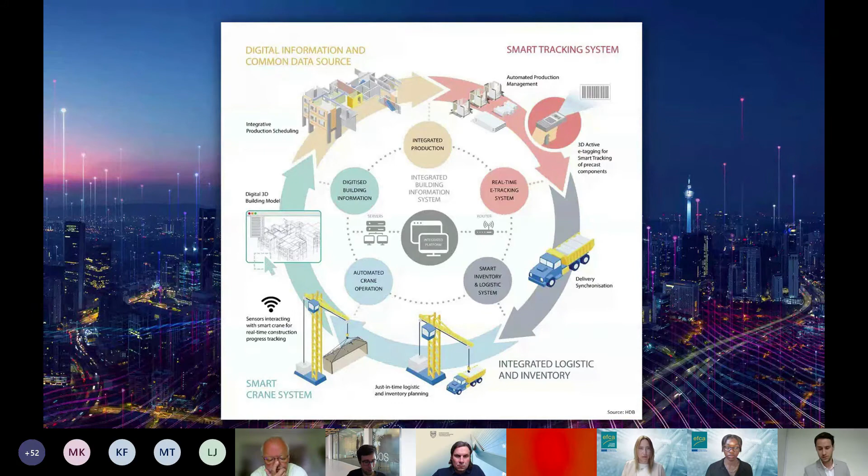Through this project, I learned to work across borders with people and stakeholders from all over the world with different backgrounds and different cultures. I also learned to work on multidisciplinary teams that go even beyond typical civil engineering work. Think about, for example, software development, on very innovative and disruptive projects for one of the biggest developers in Singapore.

And I also learned to envision new approaches for our industry and also learned to adopt new approaches to manage these innovation projects, such as Agile. Because I learned on the way that the typical engineering and project management approaches don't work for these very innovative projects.

So I hope that through the digitalization of our industry, we keep on attracting young, new and enthusiastic talent to our very exciting industry. And I also hope that because we are full of opportunities in our industry that can contribute to the fuller sustainability of our world.

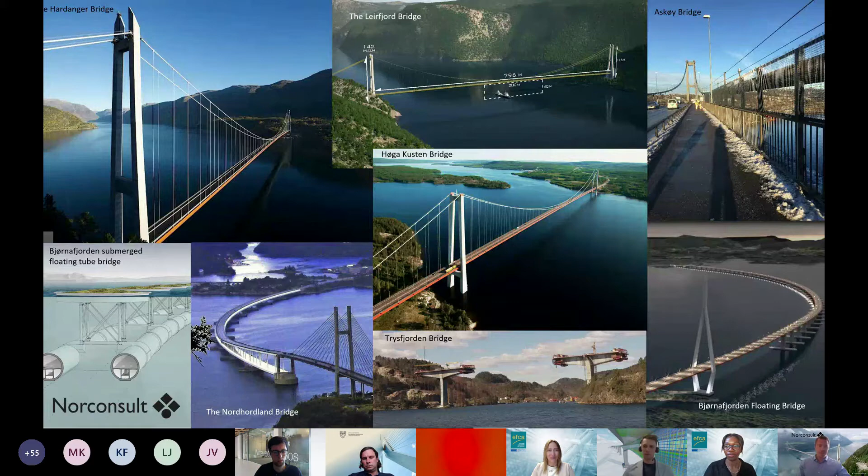I've been fortunate to work with many amazing long-span bridges so far in my engineering career, and by looking at this, it's hard not to fall in love with these structures.

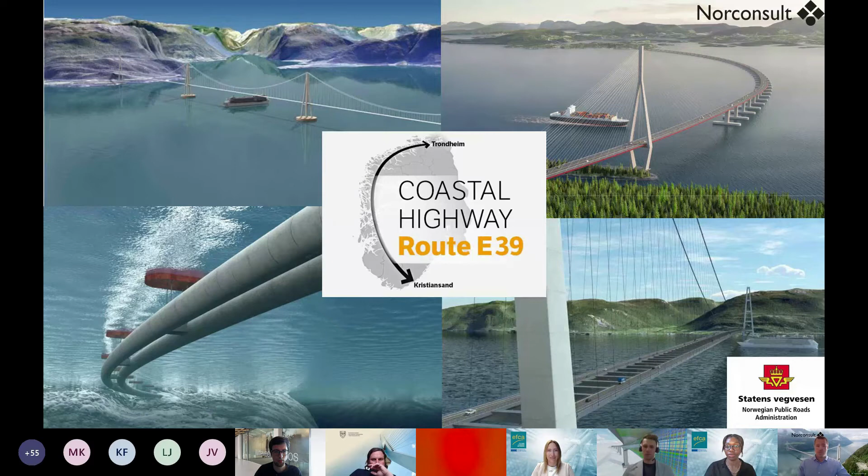The Norwegian government is planning to build a ferry-free coastal highway route along the country's west coast. And to achieve this, several wide and deep fjords need crossing with bridges and tunnels. The fjord crossing project is developing long-span bridge technology for efficient crossing of all these fjords.

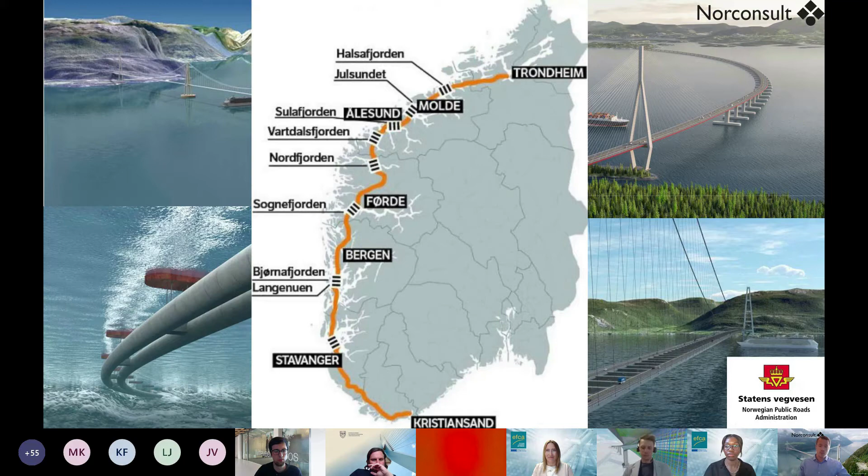And the Norwegian Public Roads Administration is managing the project, consisting of two parallel processes: development through engineering consultant companies and extensive research activity. And I've been so lucky to be part of both branches, through my company Norconsult and through my PhD research.

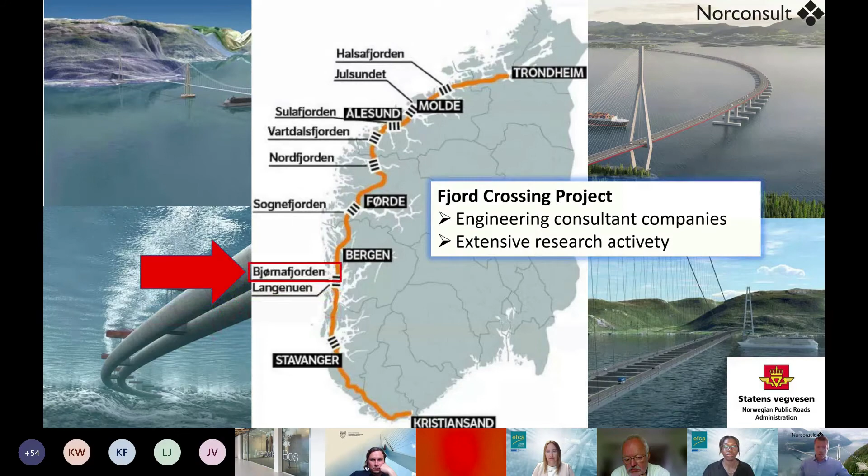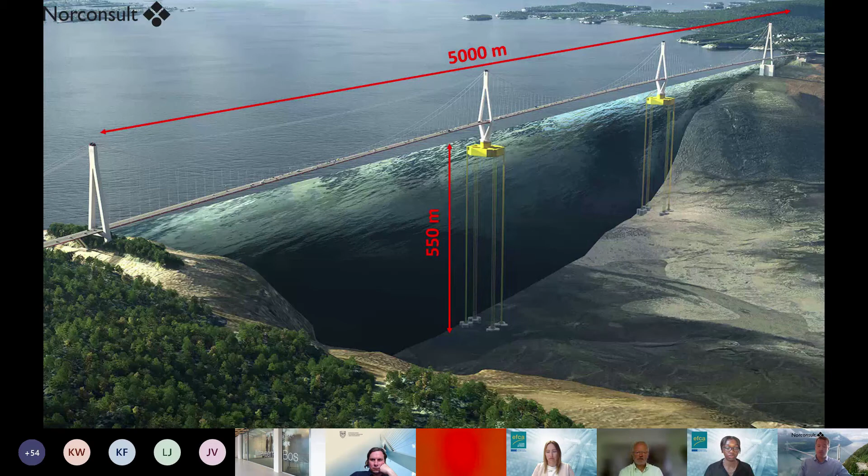Let's take a closer look at the spectacular Bjørnafjord crossing, which is a prioritized connection. The Bjørnafjord is 5 kilometers wide and as deep as 550 meters. Several bridge concepts have been studied for this fjord and evaluated, and the current choice is a curved, side-anchored floating bridge with a cable-stayed high bridge in the south end.

The west coast of Norway is famous for its rough weather, and the bridge concepts considered in the fjord crossing project are all extremely slender, making dynamic excitation from wind and waves very important.

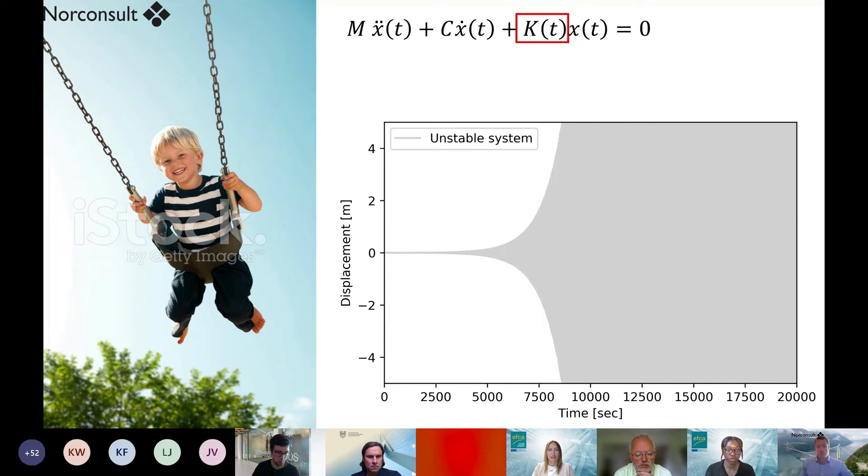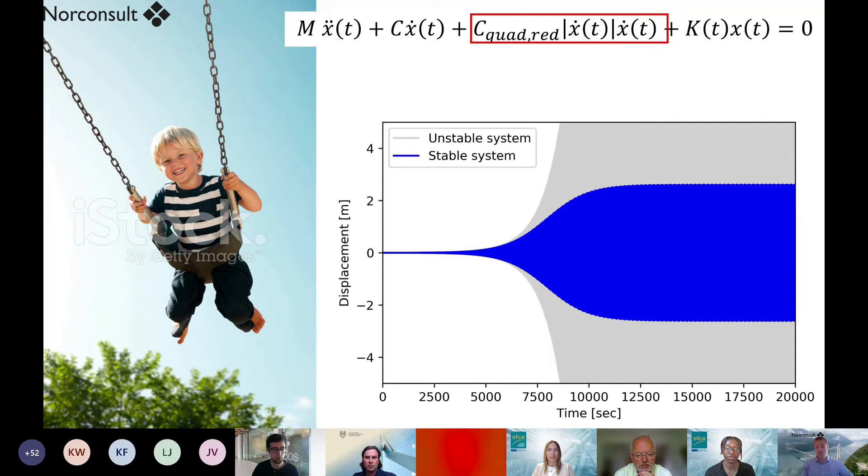This is a highly nonlinear problem that can cause instability-like behavior of a system. When developing the curved floating bridge for the Bjørnafjord crossing, parametric excitation was a concern for the stability of the project. We found a way to describe the system as a self-stabilizing problem by utilizing the quadratic viscous damping from pontoon motions. Then the problem changed from being an instability to something we could design for, and this was significant for the progress of the project.

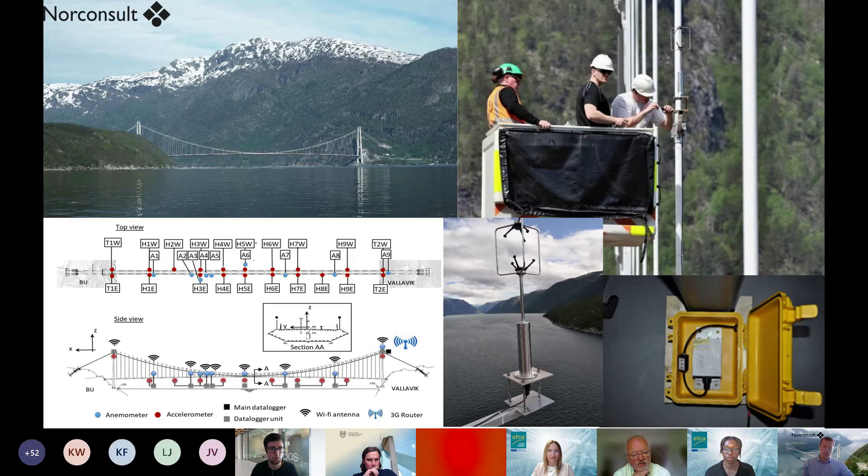Now I can't leave this opportunity without mentioning my PhD research. NTNU has been monitoring the wind field and dynamic motion of the Hardanger Bridge, which is Norway's longest suspension bridge. With the current design practice, we would predict the dynamic response as a function of the mean wind velocity as a line in this plot.

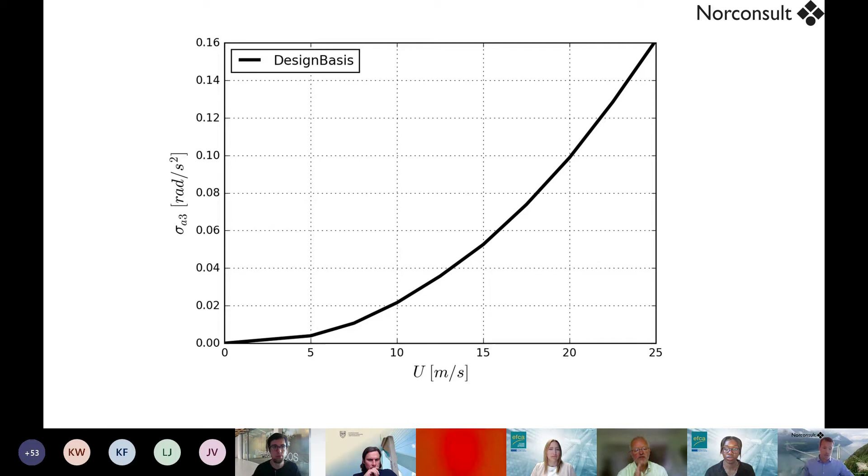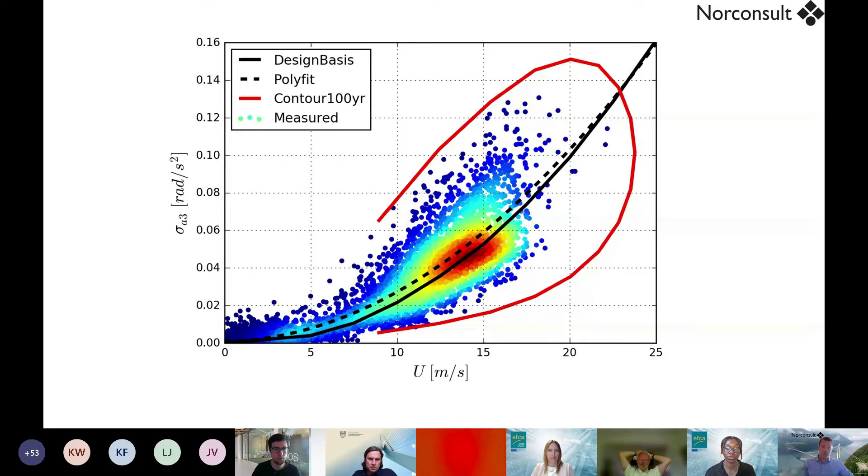And then we go out and measure on the real bridge, and this is what we see. In this PhD project, we have developed methods that can predict the line that is enclosing the scatter response that we measure in full scale. We believe our findings will significantly reduce the uncertainty in design of long-span bridges going forward. Thank you for your attention.

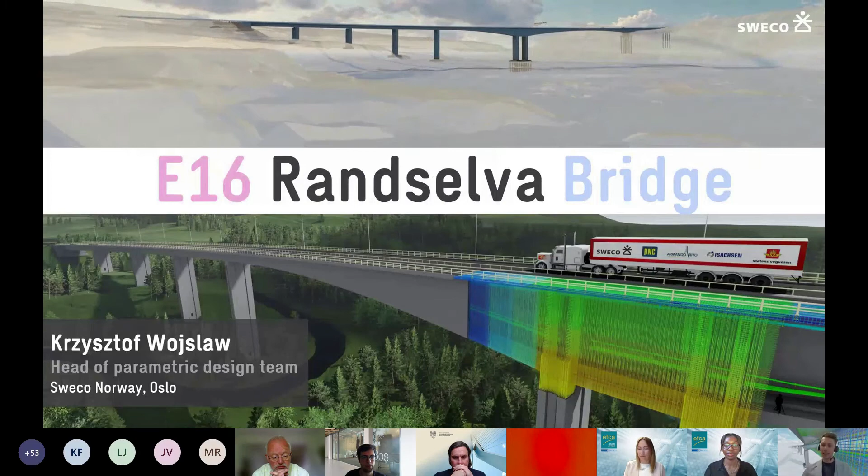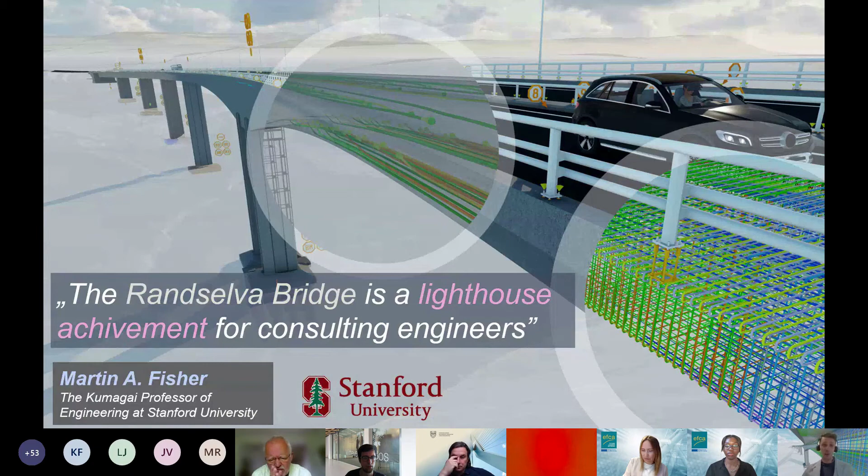It's a 634 meter long cantilever bridge with a main span of 171 meters. The bridge is situated near Oslo, and I have been working there as head of the parametric design team at Sweco. During my VDC certification at Stanford University, Martin Fisher said that this bridge is a lighthouse achievement for consulting engineers. Today I will show you 3 reasons why this project is a game changer for our industry.

First of all, this project is the largest project delivered to date without drawings. We call it model-based. As designers, for centuries we have been delivering drawings to the site. Afterwards, we changed the way of working and began preparing 3D models. However, we were still flattening the structure to a 2D representation, the paper, which then required the builders to reimagine the 3D structure.

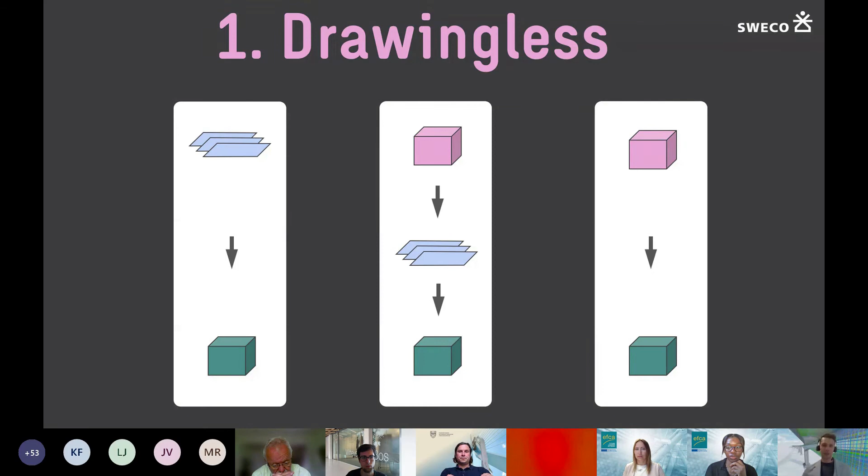Nowadays, with the newest technology, we can build directly from the 3D model. This approach ensures better quality of the delivered project, with fewer collisions and fewer errors. More than that, design time is reduced by skipping time-consuming drawings, for example reinforcement drawings. In addition, we have fewer questions from site because workers can rotate the 3D model and take new sections and views for better understanding.

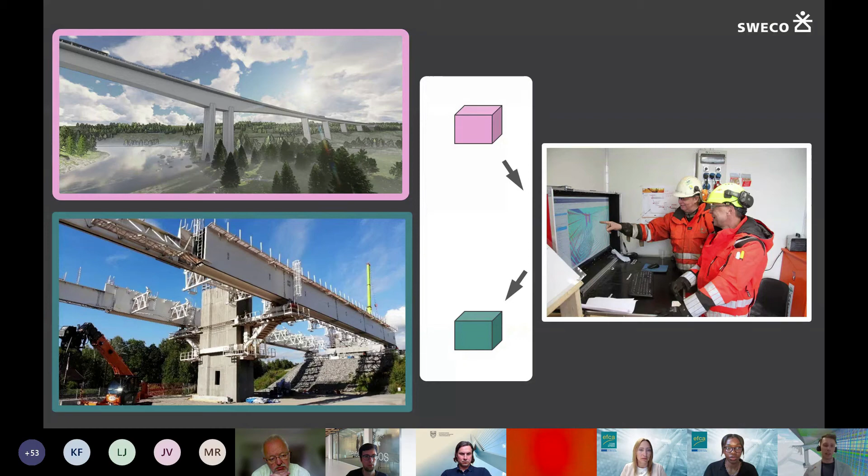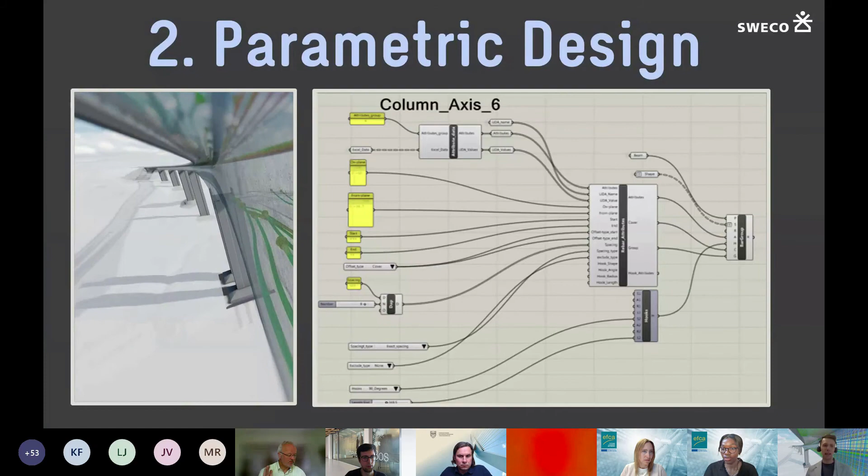The second reason why this project stands out from the rest is the application of parametric design on a large scale. Almost 70% of this bridge was parametricized, meaning the geometry was described by algorithm. This approach helps with adaptation for changes, so we can adapt quicker. Afterwards, we can create complex geometry, as you can see on the screen, with plenty of complicated cables on this bridge.

The third reason is collaboration. On this project, we organized hackathons together with integrated concurrent engineering. Hackathons are meetings where developers sit together in one room and work intensively on a script which automates the processes of designing the bridge. We gather the whole parametric design team to work together on the program.

On the other side, we have integrated concurrent engineering. This method originates from NASA's collaboration sessions on mission programs. ICE sessions gather all decision makers, client, contractor, and designers at the same place. Design work is conducted simultaneously, making it possible to introduce and approve changes during one session. This approach, connecting hackathons with integrated concurrent engineering, helps us find the most sustainable and optimal solution.

So to sum up, new collaboration methods together with parametric design and skipping the drawings are, without any doubt, the future of engineering and set standards for the whole industry.